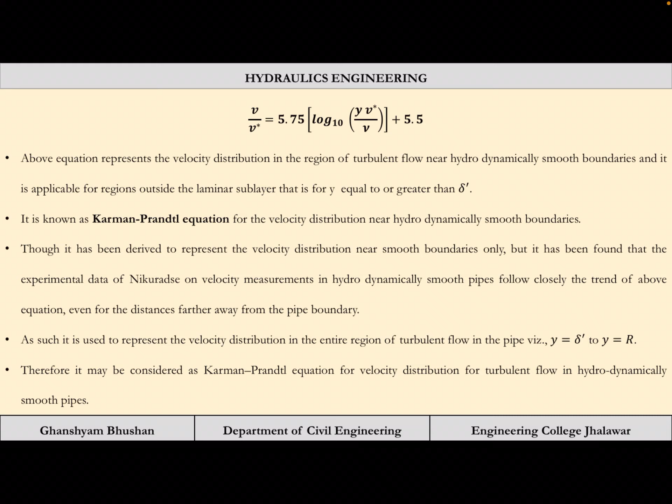Though it has been derived to represent the velocity distribution near smooth boundaries only, it has been found that the experimental data of Nikuradse on velocity measurement in smooth pipes follow closely the trend of this equation even at distances farther away from the pipe boundaries.

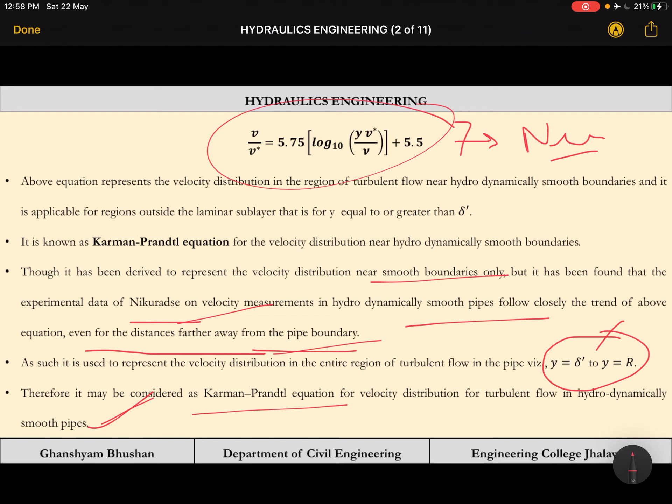We derived this for near the boundary, but Nikuradse found by his experiments that this equation is valid well beyond the boundaries, within the central region also. As such, it is used to represent the velocity distribution in the region of turbulent flow, from delta dash to R, the radius, which is the central region of flow. Therefore it may be considered as the Karman-Prandtl equation for velocity distribution for turbulent flow in hydrodynamically smooth boundaries, so this can be assumed as the velocity distribution in turbulent flow for smooth boundaries.

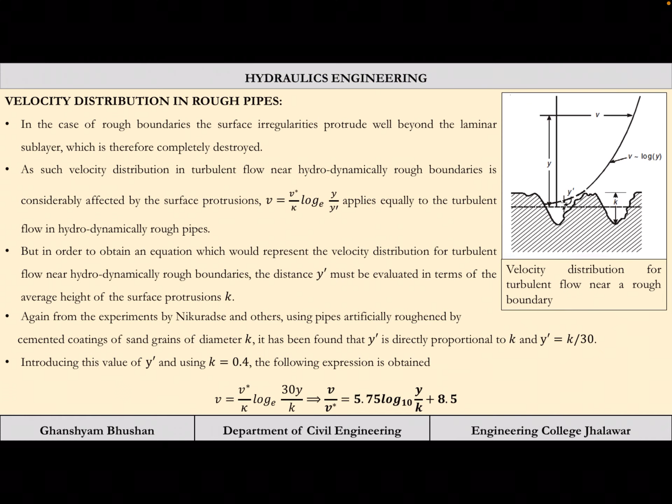Now let us see velocity distribution in rough pipes, boundaries which are hydrodynamically rough. In the case of rough boundaries, the surface irregularities protrude well beyond the laminar sublayer, which is therefore completely destroyed. As we have seen in the definition of hydrodynamically rough boundaries, the eddies penetrate fully towards the boundaries, so because of this penetration the laminar sublayer gets destroyed.

As such, velocity distribution in turbulent flow near hydrodynamically rough boundaries is considerably affected by the surface protrusion. This equation applies equally to turbulent flow in hydrodynamically rough boundaries, so it is valid in rough boundaries also, and this is the variation of velocity distribution, which you can see varies logarithmically.

In order to obtain an equation representing the velocity distribution for turbulent flow near rough boundaries, the distance y dash must be evaluated in terms of the average height of surface protrusions, that is k, the surface undulation. This k was determined by Nikuradse, who performed lots of experiments on turbulent flow, and he found that y dash is equal to k by 30, where k is the sand grain diameter he used while performing his experiments. He made the boundaries rough using sand grains, and kept the average diameter of the sand grains as k, so y dash, the distance, is k by 30.

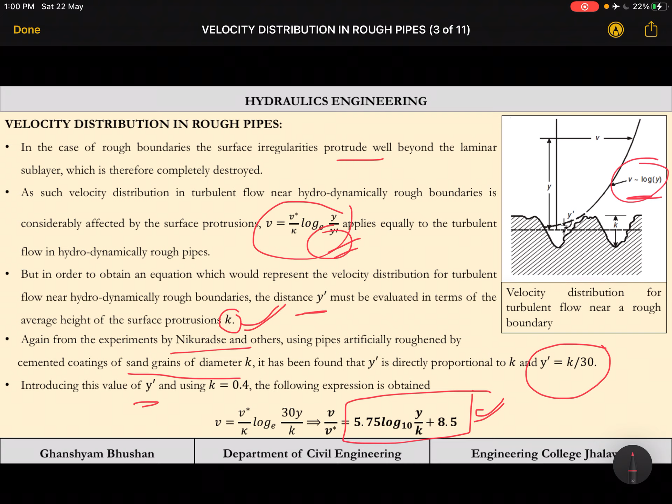So just put the value of y dash here, and we get this equation: 5.75 log base 10 of y by k, plus 8.5. This is the distribution or variation of velocity in turbulent flow near rough boundaries.

This is also known as the Karman-Prandtl equation for velocity distribution near hydrodynamically rough boundaries. Though derived for near rough boundaries only, Nikuradse performed lots of experiments and showed that this velocity distribution can be well used beyond the boundaries, within the central region also. So this equation may be considered as the Karman-Prandtl equation for velocity distribution for turbulent flow in hydrodynamically rough pipes, usable for the overall pipe, not just near the boundaries, as proved by Nikuradse's experiments.

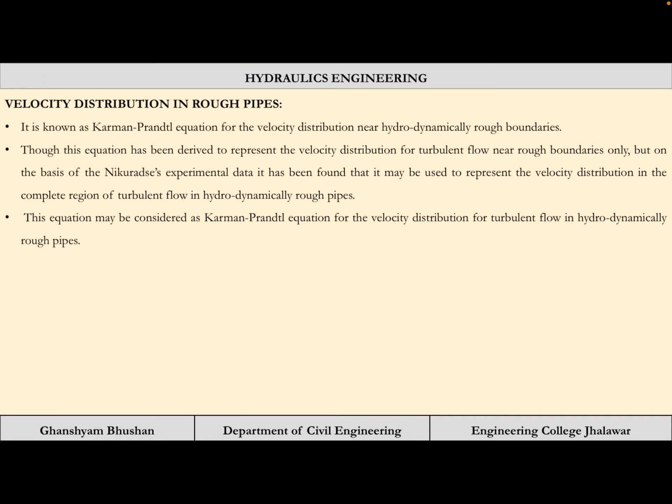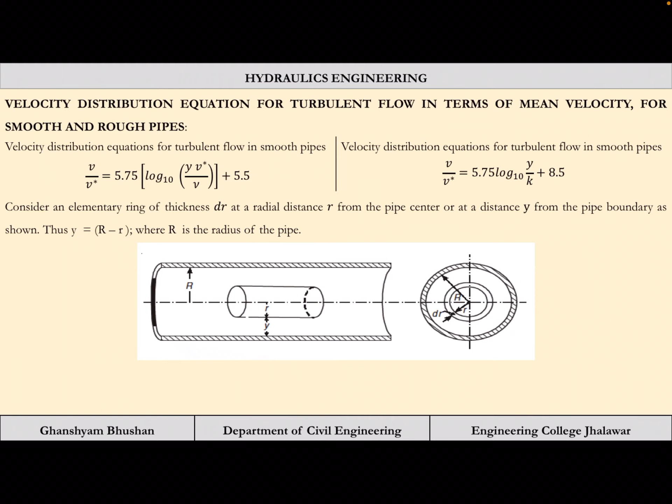Now let us see how to calculate the average or mean velocity. We have the velocity distribution equation for smooth flow and for rough flow. Now for average flow, what we are going to do is take a small element.

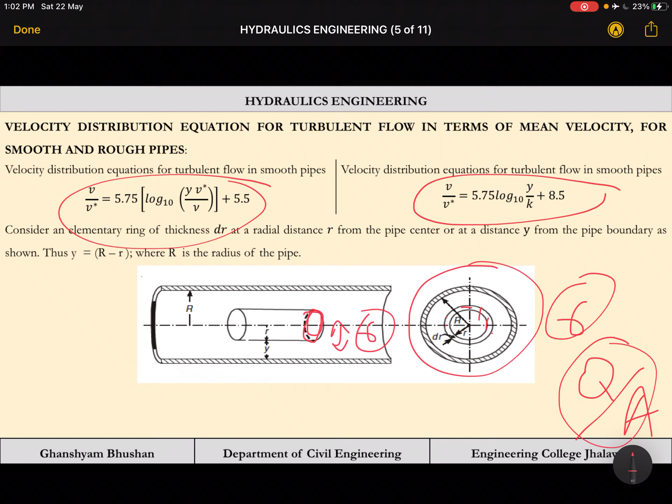We take a small element at a distance y from the boundary, or at distance r from the central region, like a ring, which is our area of interest, kept at a distance small r. Now for average velocity, we need to find the discharge through this ring, and divide by the area to get the velocity, because Q is equal to V into A.

So let us solve side by side for both. This one is for smooth pipe and this one is for rough pipe, because y by k is here. So this is for rough pipe, right.

First let us see for smooth pipes. So v by v star is this equation we have already derived. Now mean velocity is q divided by pi r square, because pi r square is the area. Q is nothing but v into dA, where dA is for a smaller ring, so smaller ring area is 2 pi r dr. Velocity is this, just put the values here, and finally we get that average velocity divided by v star is equal to 5.75 log of v star r by nu plus 1.75.

So using this we can calculate the mean velocity, capital V is mean velocity. Similarly you have to do here, just put this velocity as this, and again we can get the value of capital V by v star. Capital V is the average or mean velocity, which is equal to 5.75 log base 10 of r by k plus 4.75.

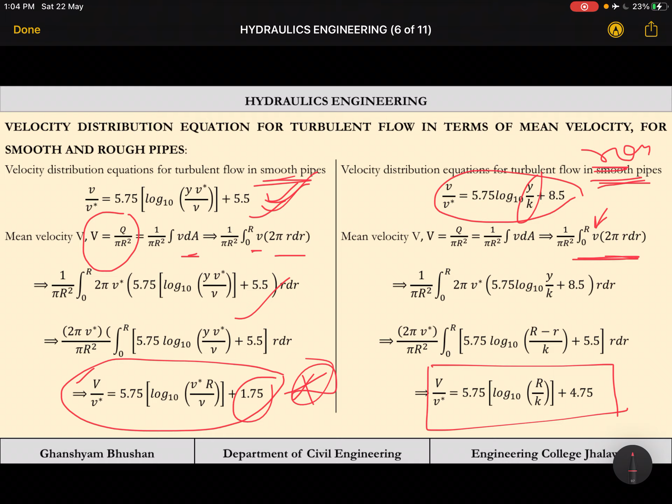So I think this is clear. You just have to put the value of v and integrate from 0 to r.

Now we have these very important equations. This is mean velocity and this is instantaneous velocity at any instant of time, this one for smooth boundary, this one for rough boundaries.

Now what we are going to do is take the difference of these two quantities: v by v star minus capital V by v star. If we take the difference, a minus sign comes and this term comes in the denominator. So finally v star by nu gets cancelled out, and you get y by r from here, and this becomes 3.75.

Same thing if we do for rough boundaries, again this term comes into the denominator, k gets cancelled out, and only y by r is there.

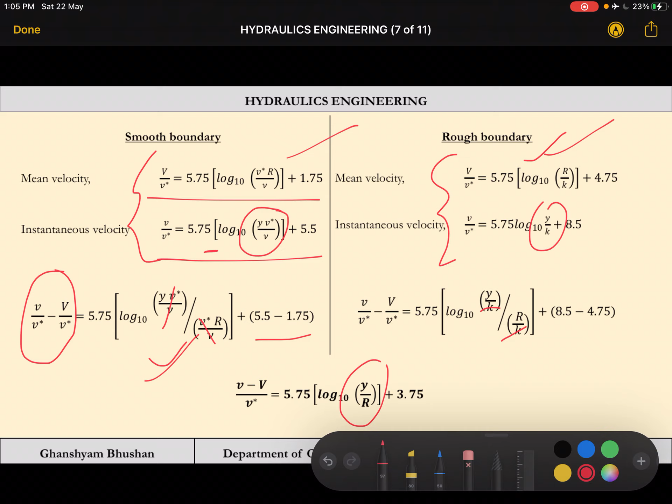So this is some kind of magic, because the difference comes out to be the same irrespective of whether the surface is smooth or rough. So it doesn't matter what the size of the rough boundary is or what the grain size is — you can easily calculate it if you have the instantaneous velocity or mean velocity, because for smooth and for rough the difference is the same.

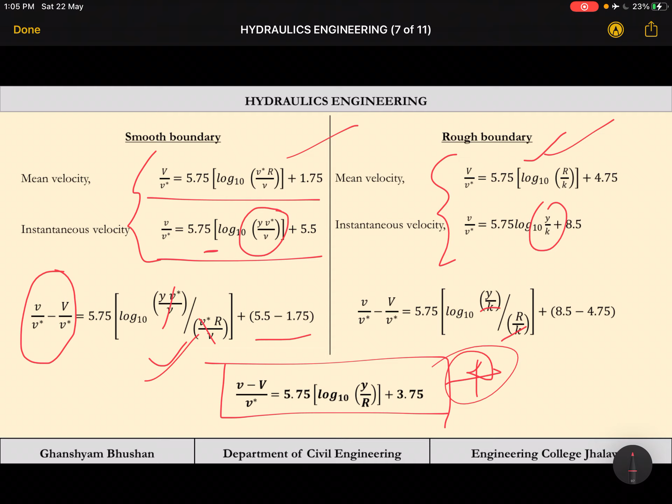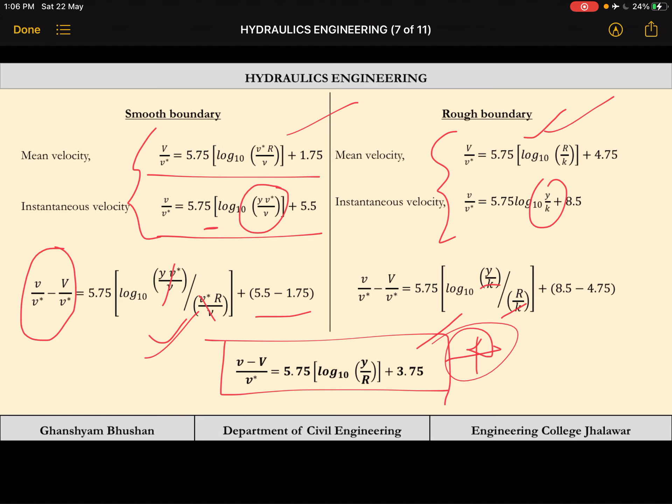So this is a very important equation. It can be used for both rough and smooth boundary, because it's simple mathematics we've done, and finally we get the same result for smooth pipe and rough pipe. Now the theory portion for the first part of this chapter, turbulent flow, is completed.

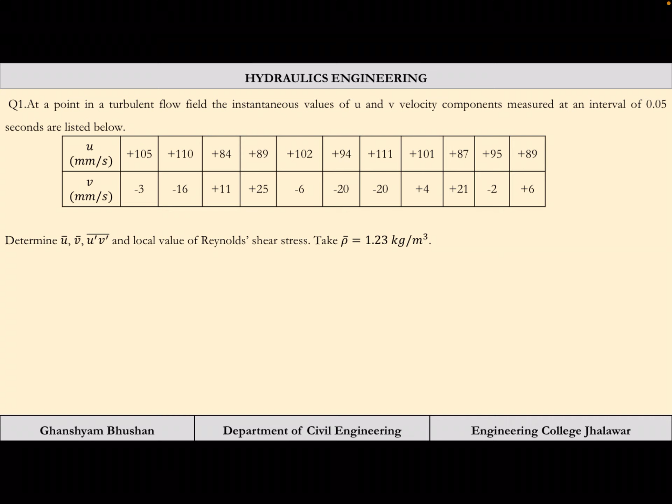So let us try to solve this problem. At a point in a turbulent flow field, the instantaneous velocity u and v components are measured at an interval of 0.05 seconds, and they are listed in this table. We have to determine u bar, v bar, and u dash, v dash, and with the help of this we have to calculate the Reynolds shear stress. Average density is 1.23 kg per meter cube.

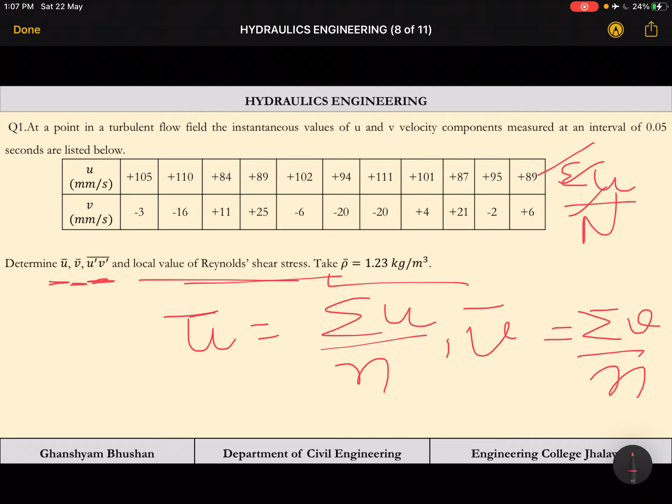So u bar is simply the summation of u divided by n, and v bar is the summation of v divided by n. Take all the values, sum them, and divide by the number of observations: 1, 2, 3, 4, 5, 6, 7, 8, 9, 10, 11 — so n is 11. Let us see how we do this.

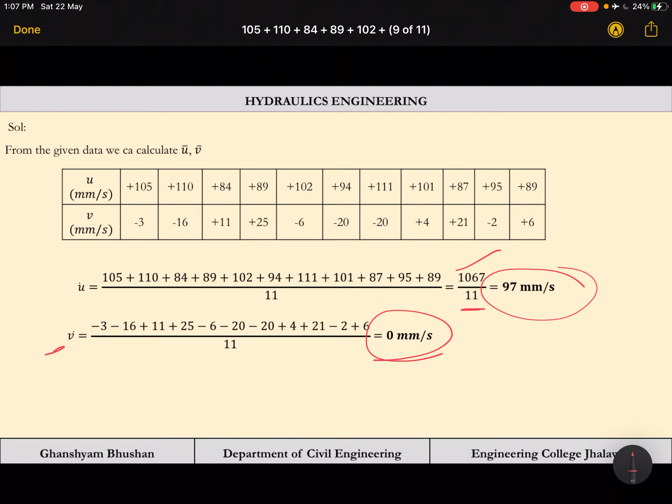So we added all the velocities, and it comes out to 1067 divided by 11, that is 97 mm per second. For v, what we've done, we take the value and it comes out to 0, so the mean velocity v bar is 0.

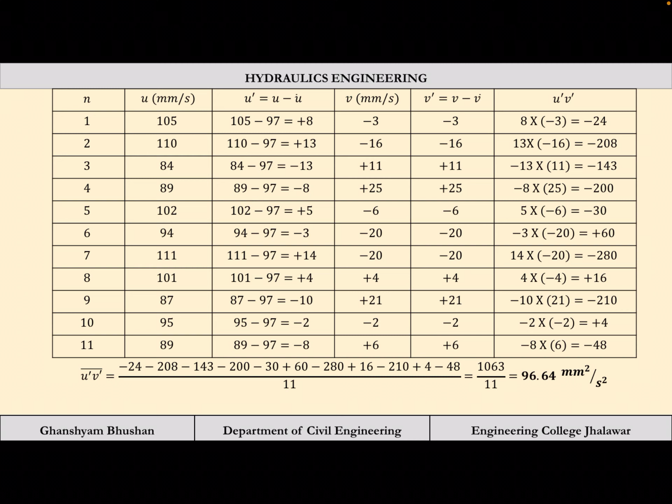Now we have to calculate u dash into v dash. What was u dash? It is the difference of u from its mean, and v dash is the difference of v from its mean. So just like u bar is 97, every time you subtract 97 from u, and for v dash it will be the same since v bar we computed as 0.

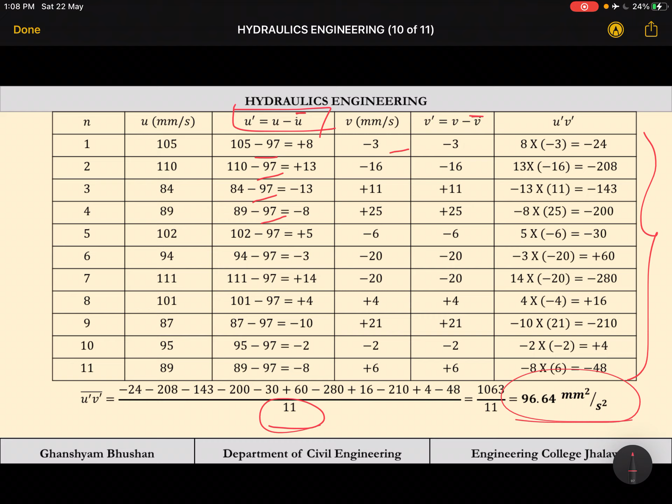So finally you get this value, you add it up, and then take the average by dividing by the total number of observations, that is 11. This comes out to 96.64 mm square per second square, because this is the multiplication of two velocities. If you multiply this value with rho, that will be your Reynolds shear stress.

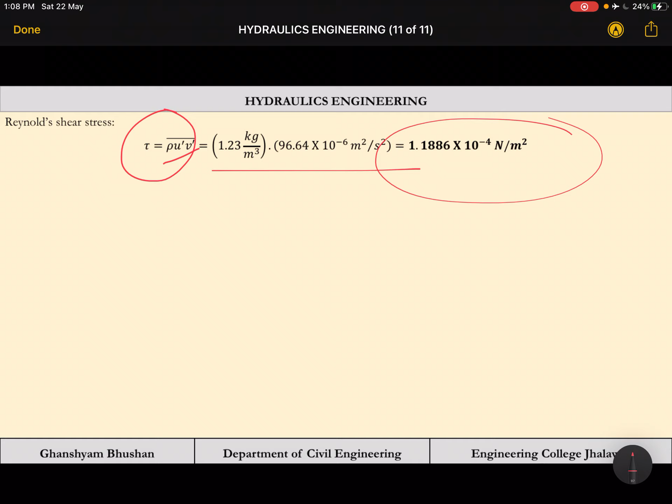So tau is nothing but this value we've already seen. We calculated u bar, u dash, v dash, and rho we already know. Multiply this and you get the answer as 1.1886 into 10 to the power minus 4 Newton per meter square, or Pascal.

So in this way we have completed the turbulent flow chapter, and in the next lecture we are going to solve some more problems and start our next topic, that is boundary layer theory. So this is all for today.